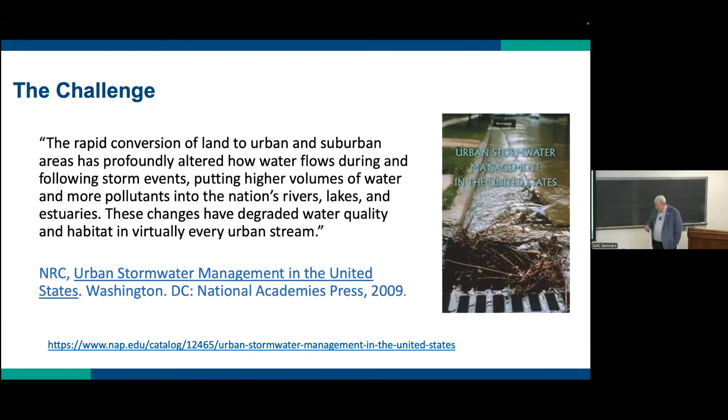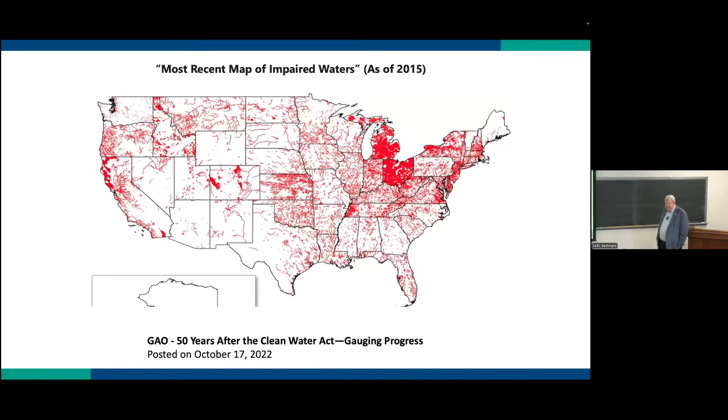And is that true? Yeah, look at the 303D list. This is from 2015. I don't know why I couldn't find a more current version on the web, but basically it's not good. And some of these areas that I think are redder than others, I think it's just because they've done more sampling and found more areas where that's the case.

Okay, back in 1978, the Pennsylvania Drainage Code was 2 pages of mimeograph sheets. And a manual we're working on now is like 600 pages. So there's been a little change in the regulations. But tell me, how can you not reasonably change the quality or quantity in a natural channel? I don't know how you would implement that on a regulatory basis or even as an engineer in design. I just thought this was kind of interesting.

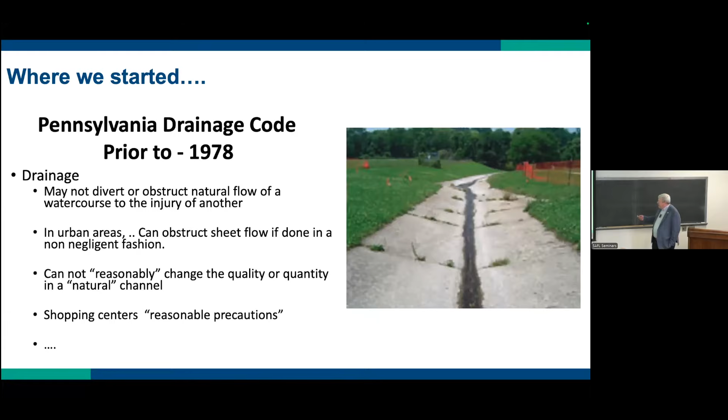And then shopping centers, you need to take reasonable precautions. All right, and I don't know how that happens either. And in the drainage days, we just moved the water out of the way. That was the whole purpose.

Then in Pennsylvania in 1978, following Hurricane Agnes a couple years previously, the state legislature put in a new law. What they said was to address inadequate management of accelerated runoff of stormwater resulting from development throughout a watershed. It's always kind of comical that a hurricane caused them to do this, and these sites really don't help that much in a hurricane. But anyway, back then we used TP40, which is a rainfall map of the United States.

And there it is on the right. So you go in, you look where you are, pick the button, and that's exactly the 2-year storm or the 10-year storm. And what we used was 2, 10, 25, 50, and 100-year extreme events, 24-hour storm, the design storm using the SCS Type 2 distribution, and match pre-construction peak flows.

Does that sound familiar? We're still doing basically this, right or wrong. SCS TR-55 was fairly new, replacing the modified rational method. I still have engineers in Pennsylvania insist on using the modified rational method, even though we've outlawed it for about 5 or 10 years there in Pennsylvania.

Calculators - the only computers were in the surveying group, which only had HP computers. For routing, we used curves. We really didn't do routing of the water through the systems. And the results: we built very, very large detention basins. And that's my 1978 Oldsmobile Omega, so I can guarantee that was what happened in that particular period of time. I now use that as a bad example, by the way. Too deep for vegetation growth, heat, and all that sort of good stuff.

But anyway, the act was revised in 1983 to address problem areas. So then you would have some areas where, because of stream restrictions, the 100-year storm would have to be reduced to the 50-year storm or 25-year storm using the release rate method. And that resulted in bigger detention basins.

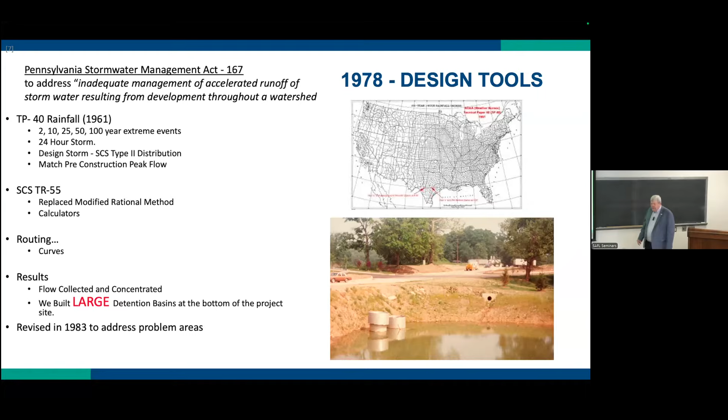So ASCE journals at the time were telling us this may not be working quite so well, even back then. Rich McCuen, a personal favorite of mine from Maryland, talked about the question of whether we're really effectively meeting the intent of stormwater management. Phil Bedient had an article that talked about the major source of stream pollution coming from urban non-point sources, which shows how good we were doing at reducing wastewater treatment pollution, I would say, in some ways. And in 1988, Rich McCuen and Glenn Moglen both talked about how basins are ineffective in controlling degradation of erodible channels.

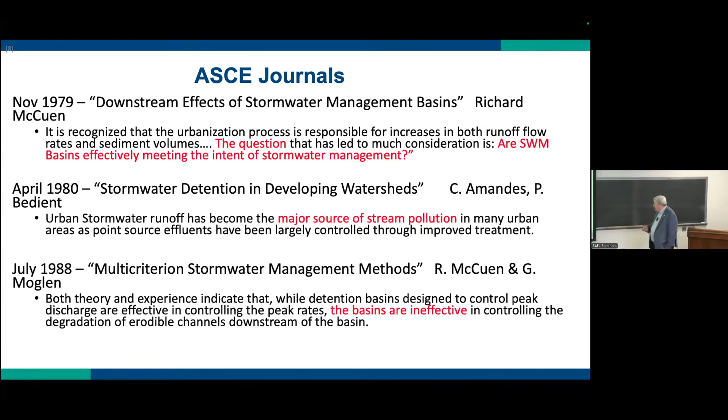Not that we paid attention to any of this, but the science was telling us this along the way. Glenn Moglen at the time was an undergraduate student, so he's going to be working for a lot longer - he's very famous in this area as well. And so then we had a boring decade or two. Nothing changed. We're still doing this.

We know it's not working and trying to figure out what to do next.

I like this. This was an eBay for sale item during a drought. It's a Texas rain gauge, and it was going for 11 cents. I wish I had bought it. I thought that was pretty amusing.

So the next phase that really shifted things was MS4 Phase 2, and green infrastructure starting to come up with some of the ideas. MS4 Phase 2 really started looking at non-point source pollution, and green infrastructure started looking more at the complete hydrologic cycle, or that was the intent. I'm not going to pretend anybody really had any idea how that worked, other than you put water in and soak it into the ground, at the time when we started building these.

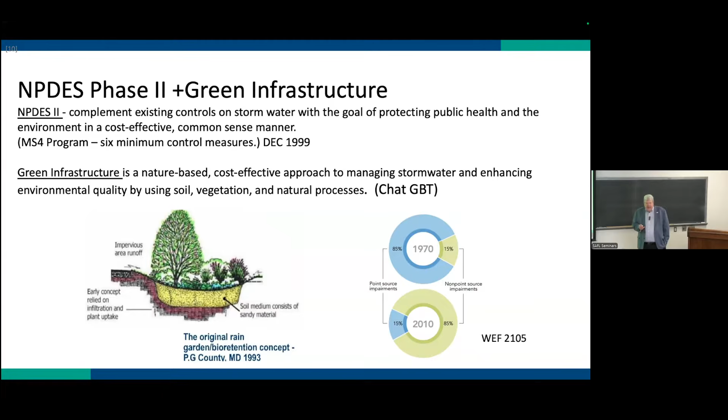I also noticed that in 1993, they didn't have any underdrains in their original design. They added them later. I have one underdrain out of about 20 rain gardens on our campus. We don't really like them very much.

So I actually did my master's thesis around 1980, looking at how ineffective detention basins were on a watershed basis as you start moving downstream. And I'm very good at hiring smart, hardworking people, so I don't have to work that hard. Clay Emerson was a master's student at the time at Drexel, and Drexel called me up and said, 'We don't have anybody in stormwater at Drexel, can you help?'

So I joined his committee, and he actually, as part of his master's, went out and surveyed 111 detention basins. That's a lot of work. He basically modeled the site for 2 inches of rainfall using some different rain gauges they put out to get a characteristic of the rainfall patterns.

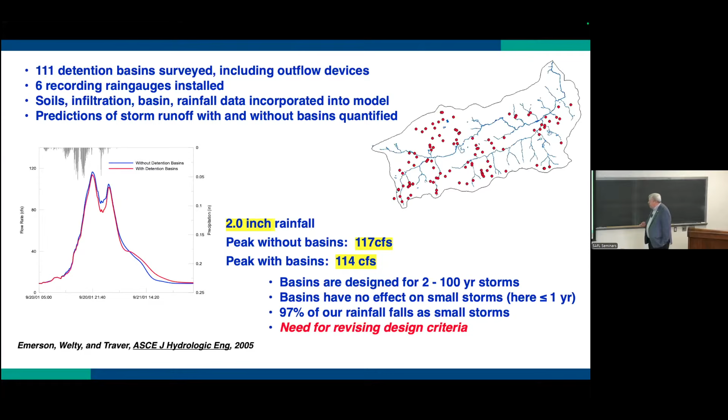He found that for 2 inches of rain, these basins really did nothing to reduce peak flow. And they shouldn't—they weren't designed for 2 inches of rain, they were designed for 3.5 to 4 inches. All of them had low-flow channels, so we didn't want to get the grass wet or anything during these smaller rainstorm events. So they might be working at that basin right downstream for that design storm, but on a watershed basis it was not a great solution. So I hired him immediately, and he became our first PhD in the area of stormwater.

At the same time, we started working again—I'm going to go back to that National Academy study. This, to me, shows the problem. If you look on the left, we have a more rural or forested stream; on the right is an urban stream. It's not the fact that the 2-year storm is bigger, it's that every storm is bigger. Whether it's a quarter inch or a half inch, you have amplification by the urban environment of all these storms, which makes very clear some of the issues we have to deal with.

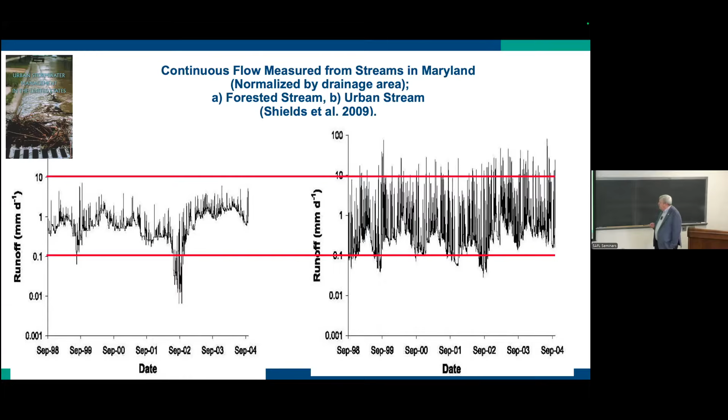At the same time, I was working with our Pennsylvania DEP on what this meant now, looking more at the hydrologic cycle. So I did a simple plot using 50 or 60 years of daily rainfall data, plotting them on a mass curve. Very easily you can see that if I have about 1 inch of capture, 45% of my hydrologic cycle in volume is less than that. If I start adding an inch for the bigger storms, I'm up to close to 80%. Philadelphia now uses 1.5 inches of capture for the combined sewer overflow. So it really shows how impactful those small storms were, and the volumes for water quality, recharge, and all of that were completely missing with our detention-based approach.

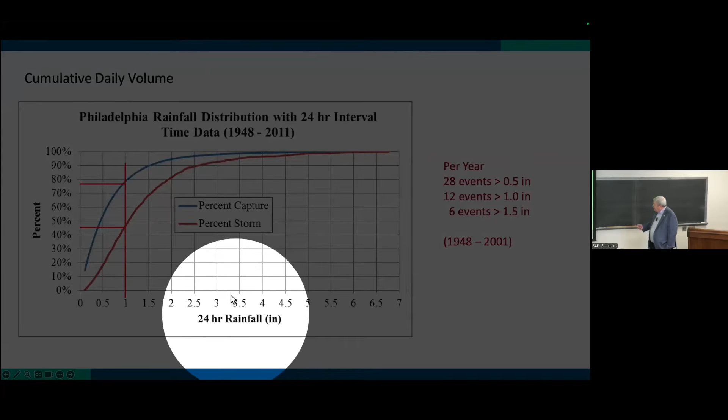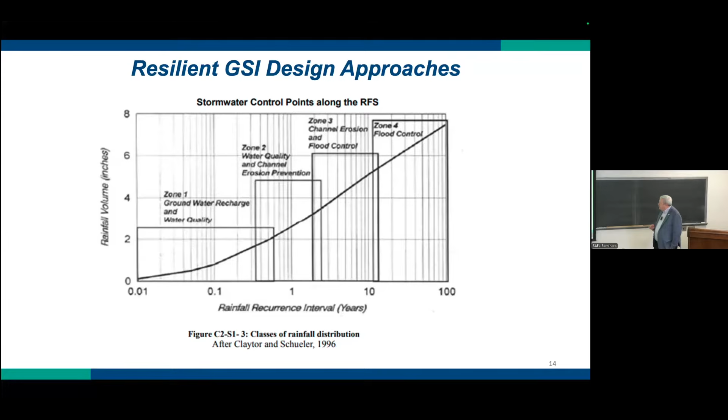Some very smart people, like Tom Schueler, started coming up with new approaches. He said maybe we should have one target for water quality and groundwater recharge, another target more for geomorphology, and then get into the peak flows and flooding flows as well—break the problem down in your design and approach to the different aspects we want to address. Pennsylvania kind of did this, and I was on one of the committees.

We argued about this for about a year, and we ended up coming up with this for Pennsylvania: the water quality and water quantity for the 2-year storm, and really for all storms up to the 2-year storm, have to be the same pre and post construction.

That's a pretty heavy amount of water, like 3.5 inches of rain. But that's not just for water quality, it's more for geomorphology. I think Pennsylvania has more streams per land area than anywhere else in the country, so we had a lot of problems with geomorphology and streams.

And then, of course, we can't get away from the 2, 10, 50, and 100-year, 24-hour peak flow designs as well, so that's also brought in here. So that was a big change for the state.

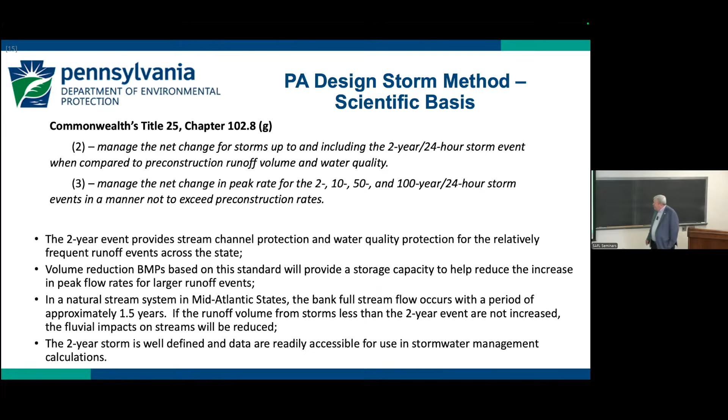So since I have to put a little Prince party like it's 1999... all right, no sense of humor.

But basically, looking at it, we had a lot of new tools. We're using TR55 still, the Type 2 rainfall distribution still, but we had computers so we could do some routing. Rain gardens were introduced in the 90s. At first, the ratio of 1 to 5 was recommended, which is the impervious footprint to the size of the bowl or the surface area of the rain garden, no more than 6 inches deep.

I think it says up to 80% compost, which is horrible—don't do that. We need at least a half inch an hour to build without an underdrain in Pennsylvania. They did not want to build infiltration until you had at least a half inch an hour.

They had static designs, and there are a lot of places still use this, where you look at the results of the site by looking at the volume of the bowl and the volume of the void space. And that's it for the static design.

And so we had questions: Is it dependable? What happens to back-to-back storms? I love the question one time I had, what happens if you have a back-to-back 100-year storm? I said, go to high ground—I mean, it's not a 100-year storm probability.

How to build these, how to maintain these, how does infiltration and evapotranspiration work? What happens in winter? Why use soil? Rock has a bigger void space. A lot of questions. So what have we learned?

Well, we built a lot of places at Villanova with the help of the state and some other funds and the university itself. So we have rain gardens and wetlands and porous pavements and green roofs at a lot of different sites throughout the years.

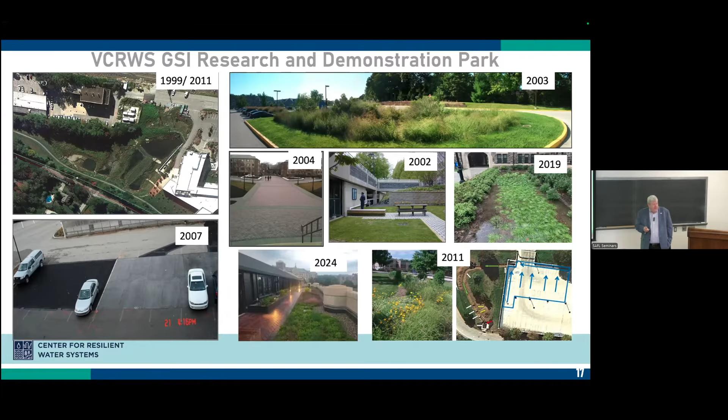And the 2003 rain garden at the top—I called it bioinfiltration—we're going to talk about a lot during this particular talk. I apologize to those of you who heard me before, because I always bring this site up because it's a great site. So, rain garden 2001, we violated everything in the state manual, but the state manual hadn't been written yet, so I could do that.

So basically, we made a bigger impervious surface, made it deeper, like 18 inches deep, used a bigger footprint. We just mixed sand and concrete sand and the native soil together, that's all we did. Put some mulch in and planted it. No underdrain, no liner, no gravel, none of that stuff.

The one thing we did right was build it right. You notice the backhoe is working from the side, not from the bottom, so there's no compaction of that surface.

The other thing that's interesting about this site: when it fills up, all of a sudden water goes over a weir and bypasses the site. So when it's full and you have a hurricane, it's never had any erosive motion over the surface, and it's never had a sediment load coming from pervious area that eroded.

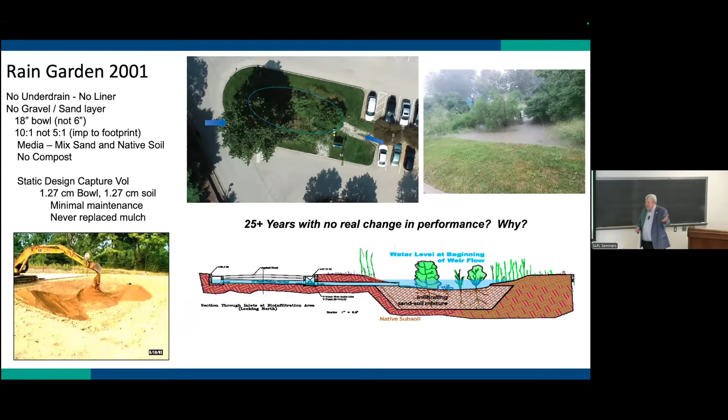And I think that's one of the reasons it's successful, and I can prove it's successful. We have been monitoring since 2003. We built it in 2001, so 25 years later, it has the same basic infiltration rate as we had when we first built it.

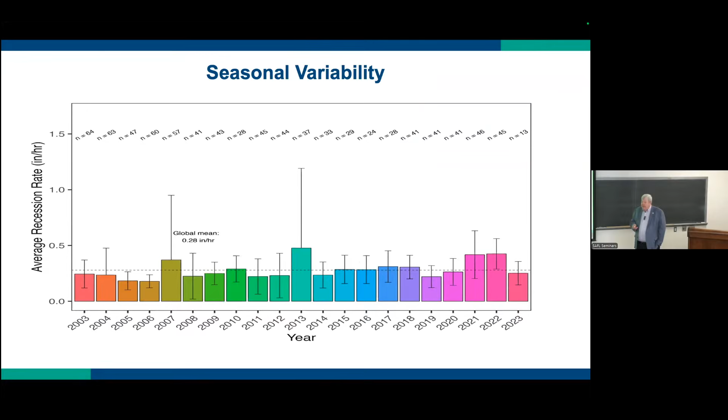Our maintenance program is very complex: we go in once a year, cut down all the grasses and rake it out, and that's it. So basically, I think we can say it's dependable if you build it right and don't neglect it.

We also started working with some of your previous speakers, Allen Davis and Bill Hunt, on one grant, looking at what we called the hockey stick approach. As a Flyers fan, sorry about Minnesota, but basically the blade here is all the void space and the bowl's volume.

And it very rarely had any outflows during events less than that volume. The ones that did occur were in the wintertime, when you have snow - we have snow in Philadelphia too. I've seen piles of snow about 15 feet on top of the rain garden, which makes it very hard to do a water balance.

The other interesting thing is when we look at this basically static design, it should be operating along that long handle. So once it's filled up, you should not get any more removals, right? But what we're finding out, storm after storm after storm, we're exceeding our design expectations on this site.

And then we looked at our treatment train - we were seeing the same thing. We had Superstorm Sandy, and it got rid of like 4 or 5 inches of rain on a site designed for 1 inch.

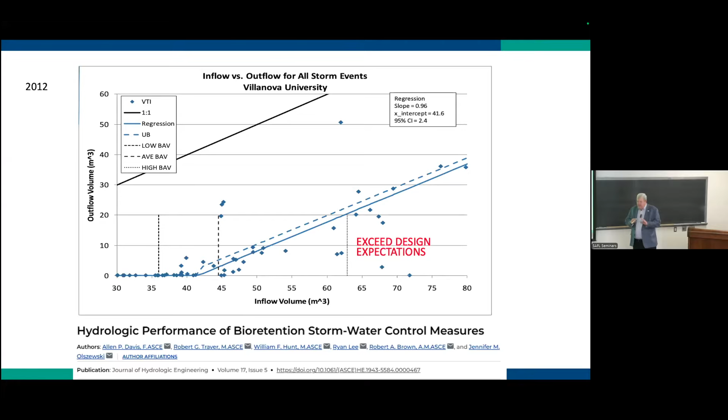We've seen this exceeded performance on 20 different sites, but Andy just wouldn't give me the time to show them all to you. We also not just worked at Villanova, we've done some work in Philadelphia through the EPA, looking at one of their infiltration trenches. They don't have a lot of space in the 17th century city, so a lot of times they build infiltration trenches under the sidewalk with some tree trenches. Basically the water comes down, comes in, and once again, when it's full, it bypasses.

This one was built so that with about 2 inches of rain, it should be up here. But it never filled up more than half full over 30 months of monitoring, including a lot of storms greater than the design storm.

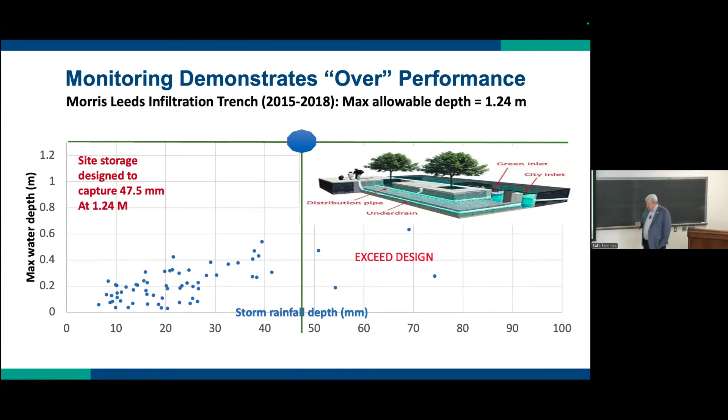So obviously, with the static approach, you're building it twice as big as you need to. And that extra space - the water can't even get in by the hydraulics - so it's a complete waste of time and money. As a city engineer, I'd be much more interested in building using that, looking at infiltration as part of it, and getting a lot more effectiveness for my particular sites.

The last one I want to show you is one we did near the Philadelphia Zoo with the Philadelphia Water Department. A little different setup - they had one swale, a grass swale, rain garden, no under drains. They did have a rock bed to the side - it was supposed to go underneath, but they ran into a utility, so they had to put it to the side.

I actually like that better because you're expanding your infiltration footprint, so you should be getting more performance. And the nice thing about working with the city is they can turn on all the fire hydrants so I can check them out - using the John Gulliver approach, filling up these things with water from the fire hydrants.

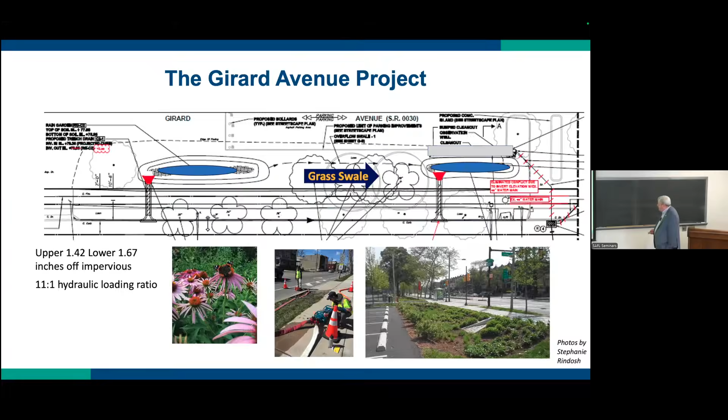Here's one storm, and I have tons of them I could show you. We filled it up with the fire hydrant. Then, thanks to Father Peter - or Father President - we got an inch of rain overnight to help us, which was kind of unplanned. The next day we went back and filled it up a second time. So in less than 48 hours, it got rid of 6 inches of runoff volume.

It was interesting - we saw water moving to the rock bed before it overflowed into a pipe connected to the rock bed. But the other really interesting thing was that the second it stops raining, or the second the water stops coming in, you start having recovery of your system. Most rainstorm events aren't a single peak flow - they're a little peak here, a little peak here.

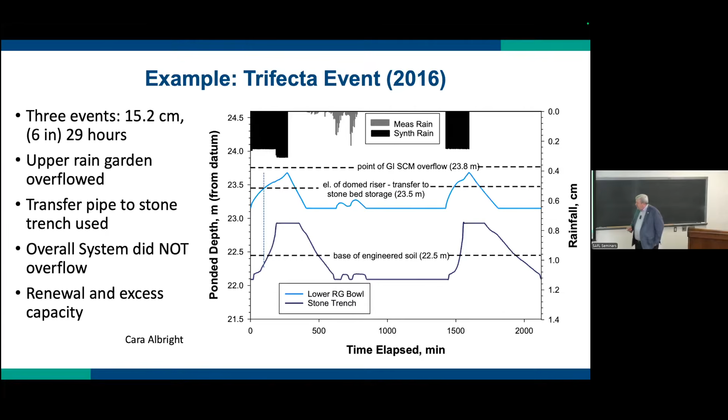So from all these studies, and a lot of studies you haven't seen, we came up with what we call the evolution of infiltration, where we want to use the vadose zone, the soil physics, as part of our rain garden design. SWMM has most of that built in, Recarga and a lot of other models out there can do that soil physics too. The other interesting thing is how to increase your saturated hydraulic conductivity.

Freeze-thaw cycles, plant roots, macropores, all of that actually increases or recovers your saturated hydraulic conductivity. What decreases it is something we have control over: stomping, bad construction, poor soils, poor media. Any site that's been built right doesn't have a problem with long-term performance.

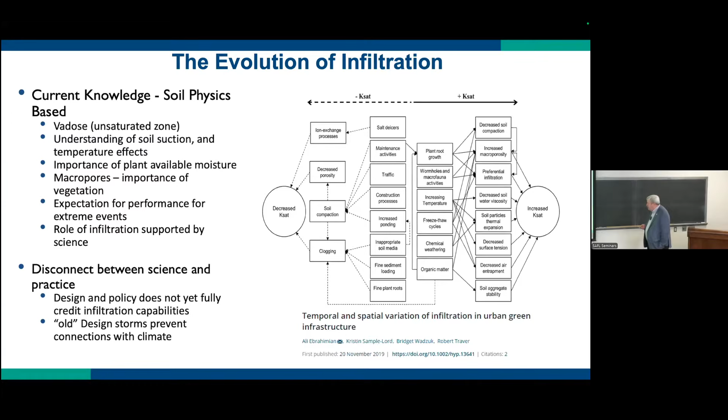We have two sites at Villanova that did not work. One was built over an old parking lot, so once we discovered that by filling it with water, we just put a few chimneys of sand in it, and it works fine. The other had concrete sand mixed into the media, which sealed it immediately, so now it's a nice little pond. But that's 1 out of 15 or 16, and it was a construction error. 1 out of 15 or 16 is pretty good.

We also shouldn't forget about evapotranspiration. How much evapotranspiration do you get during a storm event? Not much. But after the storm event, it's very critical for recovering capacity for the next storm. If you have that ET and the plants, you're also regaining root pathways for infiltration, maintaining the site. So this was just a little example of how powerful this can be.

On the right is a green roof we built at Villanova a long time ago, which had an underdrain and performed pretty well. The blue line is a mass curve of the rainfall that came in over a 9-month period, and the pink is the outflow through that underdrain.

We also built a little weighing lysimeter on the roof to measure the depth of water, the weight of the water in the soil, to understand it a little better. On that one, the blue is the same rainfall accumulated mass, the green is what left by evapotranspiration, and the difference between the two would be considered your overflow, which is very minuscule.

So we found that not putting an underdrain under a green roof increased its performance by about 30 or 40%, which is kind of amazing. This shows how strong those plants are at removing that water, and we can translate that to rain gardens, bioswales, and other sites as well, which we have done.

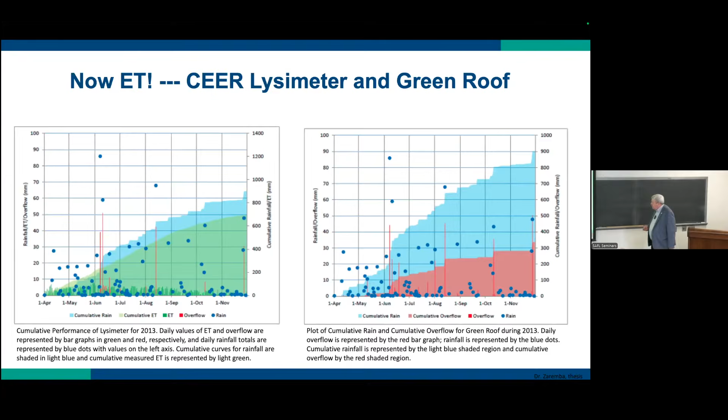Another question I brought up was, what happens in major events? This is a 200-year, 12-hour storm, definitely more than the little over 1 inch this site was designed for. It's got some pretty heavy peaks, but there are periods of recovery between those peaks. Our site, designed for about 1 inch, got rid of almost 3 inches of rain in this extreme high-intensity event, almost 3 times what it was designed for.

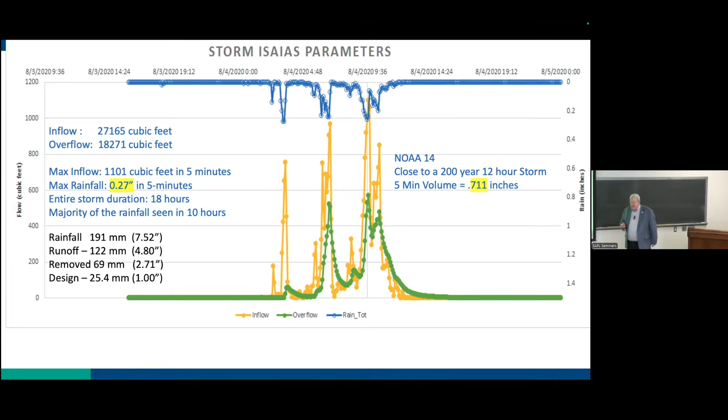We see that in multiple events. Superstorm Sandy was 3 days of steady rain, so we also had 3 days of infiltration with that particular storm. We see that pattern a bit more when looking at these projects, and it's nice to have 23 years of data to draw on.

You can go through and do mass curves and try to figure out where everything goes. And so this is our looking at their water cycles. And the key takeaways from this particular site, I would say, is 54% of the inflow to this rain garden is removed by infiltration.

And 20% by evapotranspiration after the storm. So one of the problems everybody was thinking that all that water disappears is going down into your groundwater. It is not. A big percentage of that is actually going into evapotranspiration from the soil after the storm event.

So if you're doing a mass loading with water quality, that's a very important concept to remember, which we are trying to do the same thing now for water quality data, looking at the same type of cycle as this one is. So what have we learned? Well, proof of concept, I think we got that, works pretty good.

Back-to-back storms, I don't really worry about it. It doesn't occur, and when it does occur, it's not enough significance to make any difference in my results. Infiltration and evapotranspiration are critically important, and I get to the point where I see some of these sites are built with so much sand that the plants struggle, and they're not going to work as well about maintaining your infiltration pathways. I'd rather have a little more fines in there and make these plants happy. Landscape architects will probably like that statement.

If I go down, what I have in process, water quality, we're still working on that. Longevity, maintenance, got a good track record. Still have a little more to do. Climate change, we'll talk about. Extreme storms, I'll talk about that a little bit more.

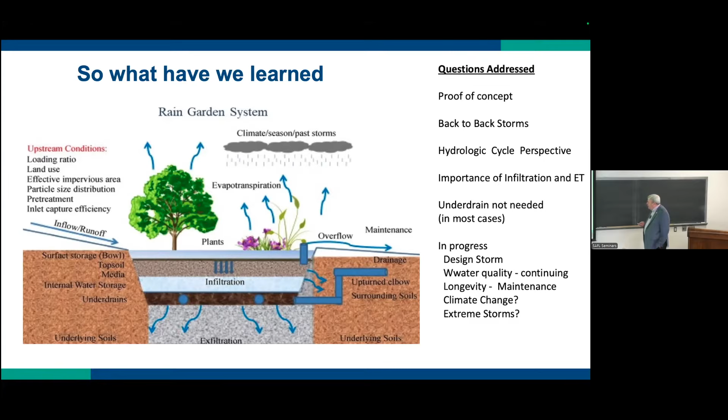All right, I don't like design storms. They've been stuck with me since 1978. We got to do something better. And what I mean by that is how we do a design storm.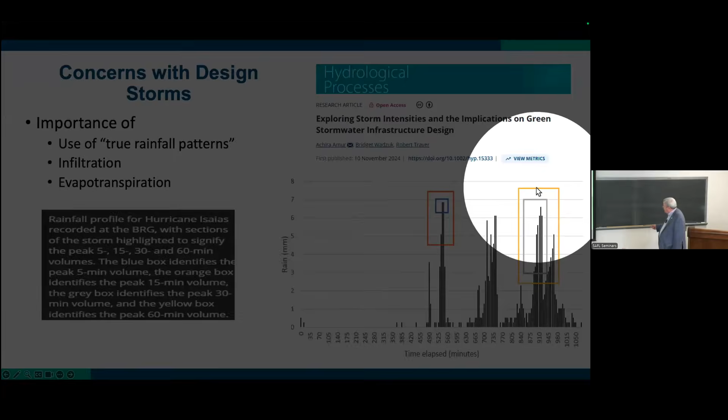So this is hurricane, that superstorm Isaias I mentioned. If I look at the statistics, there's the 5-minute peak, there's the 15-minute peak, there's the 30-minute peak, and there's the 60-minute peak. In our IDF statistics, those are all smashed together into one location in one particular storm in the statistics. If I go through now and look, basically, this is what I normally see on a 2-year storm.

Is very distributed rainfall all over the place. It does not have that steep peak in the center. Those are both the same volumes. And that same very large peak in the center will prejudice your design to rock beds versus the green infrastructure that takes a little bit of a time. And we just don't see that high intensity center point.

And there's a 25-year storm and a 2-year storm, and I can show you like 50 of them. Sometimes I think we're taking the thunderstorm 5-minute period and putting it in the middle of a big warm front or cold front or cyclone type rainfall event where you don't have those high intensities. And that prejudices our design.

And I'm not the only one who thinks so. McPherson, I have no idea who he is. In 1958, I was only 2. John was about 8. Basically come through and talked about this as unrelated values from a variety of storms, which are for a rarer occurrence than indicated.

Yen and Tang basically said design storm is to be used for the purpose of design of drainage facilities based on catastrophic failure. I don't consider a rain garden overflowing catastrophic failure.

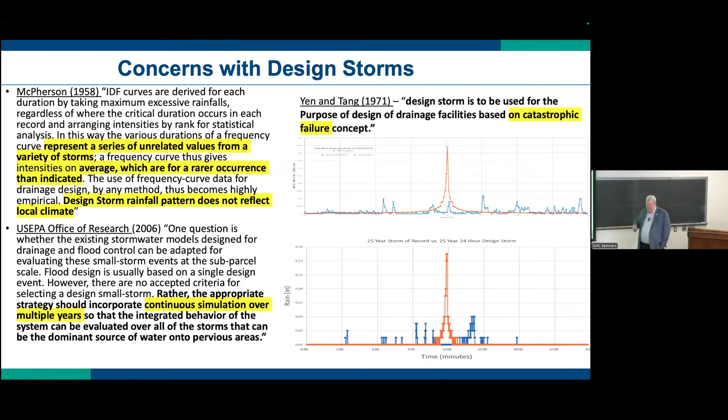Basically, the Office of Research in 2006, which we used to have an Office of Research, talked about the continuous simulation over multiple years would be a much more superior way of looking at these smaller storms and water quality aspects. So we're trying to do that.

Since the Pennsylvania, my former student convinced me to help write the new Pennsylvania Stormwater Manual. I should have flunked her. But basically, we're trying to put in some of these concepts now. So we're allowing the use of continuous simulation.

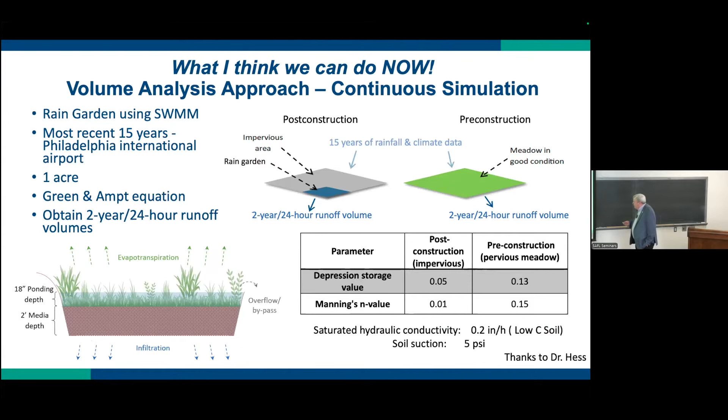So here's an example site just to show you how it works. We're using SWMM. There's a lot of models you could use for this. And it's a fairly low, 0.2 inches per hour, low C soil saturated hydraulic conductivity. We're running 15 years of rainfall data through this site in 1 minute increments.

And luckily, the state law, they wrote it, says the 2-year storm has to be the same before and after. It does not say the 2-year rainfall. So I'm using the 2-year runoff. So basically what we're doing is we're running the model for 15 years for 1 minute data, which is very simple to get these days, running it through, taking the worst 24-hour period in each storm, sorting them, and the middle one is the 2-year storm.

And basically we're advocating this. Now you can still do it the old way if you want a bigger site that's less effective. But we're figuring out this will also give you a lot more impetus in looking at good infiltration sites on your property, so it'll perform better as well as for a designer. And so that's an example design.

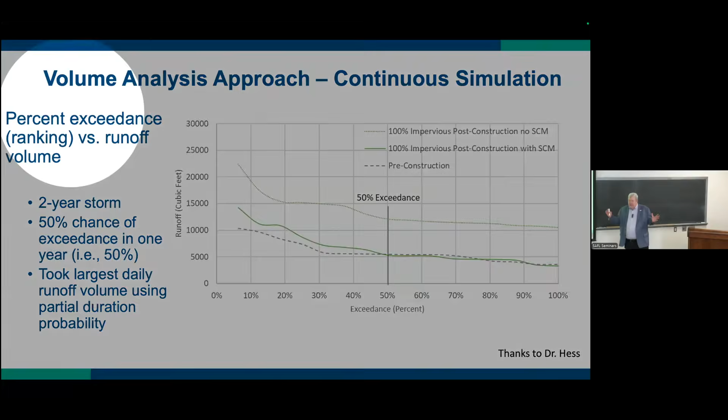One of the things that was very interesting is, and we've done this for all different soil types, you just get a little bigger or a little smaller basin based on your soil type. And we looked at the flow duration curves—you don't have to read this mess of lines—but the flow duration curves with this approach were equal or less than the pre-construction. So the geomorphology up to the 2-year storm was pretty much assured, because the amount of hours you were subject to the erosive qualities would be the same as pre-construction. And we thought that was pretty cool.

Not part of the state regulations, but it's a good way of expressing how well it worked. And in fact, it worked better than just the 2-year. It probably went up to the 5 and 10-year in a lot of cases as well, but I can't require that for the state.

Okay, we finished that. And basically, now we said, all right, we're doing the 2-year storm by a continuous simulation. We can't ask the consultants to go back to a design storm for peak flow design. So we borrowed something from Switzerland, in Zurich, where they just have like 5 storms and run everything through. But instead, we decided to try a storm of record design.

So what you have to do is pick a storm in your record that's greater than, between the median NOAA 14 and the 90% confidence interval for a 24-hour period, for each one of these events, and design your detention basin to meet that value.

And so then we went through it pretty much, and it's kind of sad—in Pennsylvania, we were able to find the 2, the 5, the 10, the 25, and the 100-year storm all in the last 15 years. We couldn't find the 50-year storm; we had to go back 20 years to find a 50-year storm.

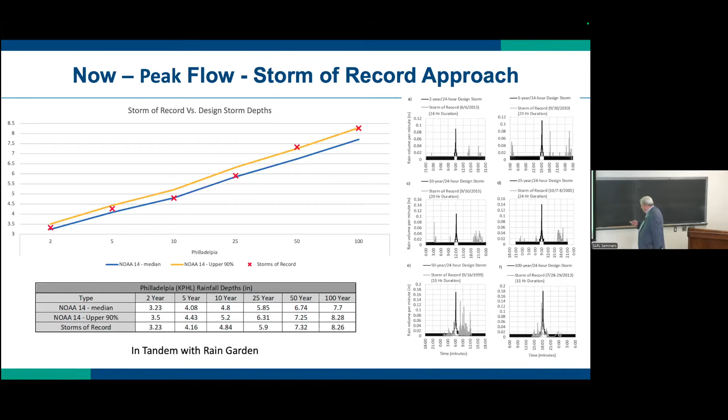And so then we basically did the design. Now, this is assuming I've already also done a water quality volume design, getting rid of that first, the difference of the 2-year storm. So that's reducing my peak flow requirements as well. And basically for this particular site, it got 25% smaller for the detention basin and a half a foot shorter. So is that significant? Well, if we're asking developers to develop 2 instead of 1 site, you want to basically take a look at what is good for the homeowner, life cycle analysis, and cost and things like that as well.

So you can make it come up with a little smaller site. And so Randy is probably going to ask me, isn't smaller less protective? I don't think so.

Sorry about that, I forgot. I had to get rid of all these slides from Andy—he wouldn't give me the whole hour.

But one thing we found was that the design storm pre-construction peak is much higher than anything using these storms of record. It really accentuates that pre-construction peak, so you're allowed to put out more than you would expect out of a natural system—the pre-construction peak in the design storm is accentuated. Now, the good news is it probably doesn't make any difference, because you're never going to have that design storm—it doesn't really happen that way. But we basically felt that this was a very effective design.

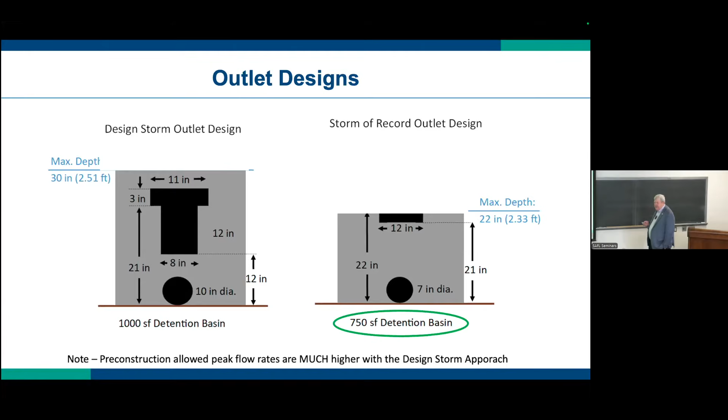And this is still under review and still under revision from the 6,423 public comments. One thing we're trying to put incentives into our manual for is to look at diversion. And the idea is, our rain garden has worked at Villanova for 25 years—it's a pretty good example, right?

And basically what we're looking at is, we understood that during hurricanes, we never have any erosive flows, never have the big sediment loads coming off the grass during those larger storms. And so basically what we have—this is a diagram from that site—it's basically just a little water coming in from two inlets.

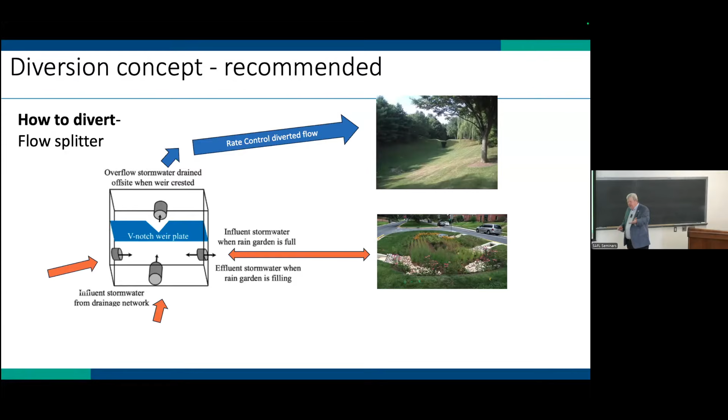There's a V-notch weir that pushes the water into the rain garden. When the rain garden is full, that shuts it out and it goes into a detention basin. We think that is a very good design for water quality and peak flow, especially for homeowners thinking of life cycle design costs for these systems.

Have we done it before? Sure, this is one from Allen Davis at the University of Maryland. They did a curb cut and built a little rain garden in the median strip. When that's full, it pops out right next to it. The only problem is you have to make sure you have enough slope to get the water in. Sometimes that doesn't happen.

Does that look familiar to anybody? Burnsville, I visited in 2006. I'd like to see some current pictures to see how well they're doing. I like the design, but when it's full, water just goes back into the peak flow, so that's a good example of a diversion design as well.

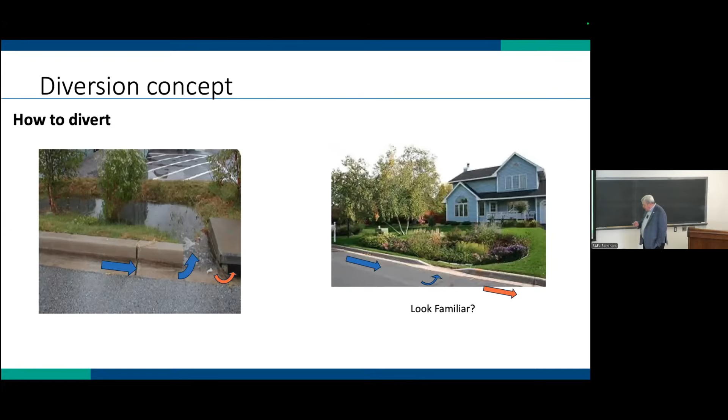So thank you for giving me some examples I could use in Philadelphia. A little bit off the line. I've got a few minutes left, I think I'm going to be almost on time, Andy.

It'll never happen again. But we've also been working on I-95 in Pennsylvania going through Philadelphia. They have to meet the combined sewer requirements of the city, and they're building hundreds of rain gardens, so it's a great avenue for research.

We're doing a lot of things. One thing we're finding is they have a lot of designs with one inlet going to one rain garden, one inlet going to another rain garden. And guess what? Looking at the flows coming in, it's nowhere near what the engineer expected. Some are higher, some are lower, and for different storms there are different percentages of what goes into one versus the other.

It's an elevated highway with inlets designed for a 25-year storm. I'm not sure how the 100-year storm knows to get to that rain garden. They've now changed their recommendations based on our research, so they have to look at that now. I just wanted to put a little hole in the sound wall so when it overflowed it would just pop in, but structural engineers don't like me.

So basically we're looking at another site that has a long swale, and we can take a look at multiple inlets going into one swale, so if one's a little higher and one's a little lower, it's okay, we're still going to manage that. Or you saw the Philadelphia Zoo example that had two inlets going into two rain gardens, so if one gets a little clogged, we have another one.

We also found some inlets were, because of the edge of the inlet, six inches away from the sound wall. It's amazing how much water bypassed for the smaller storms and never went to the rain gardens because of that. So we're fixing that, and the nice thing is being able to combine laboratory and field research to look at some of these issues.

Construction errors, oh my goodness. Filling up, using the John Gulliver approach and turning on that hydrant to fill up the rain garden is the best construction inspection you can find. You can find if your weirs are the right size.

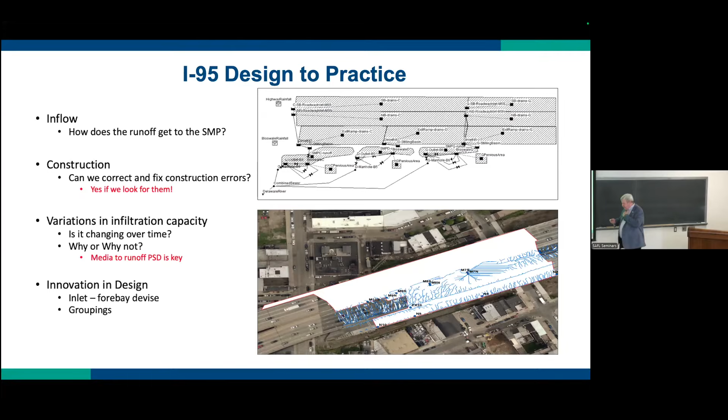Innovations in design—I'll show you one I really like. Of course, Philadelphia has a different term: stormwater management practices. I use stormwater control measures. You use BMPs. China uses sponge city. England uses SuDS. It's very confusing.

But we found one site and it failed. We have all sorts of pictures of construction equipment parked at the bottom of the swale. They made it too steep on the side, so all the mulch came down to the center.

When you have cattails—is that you? No, I thought so, I thought that might be you. Rebecca, you can stand up so people can see how tall the cattails are.

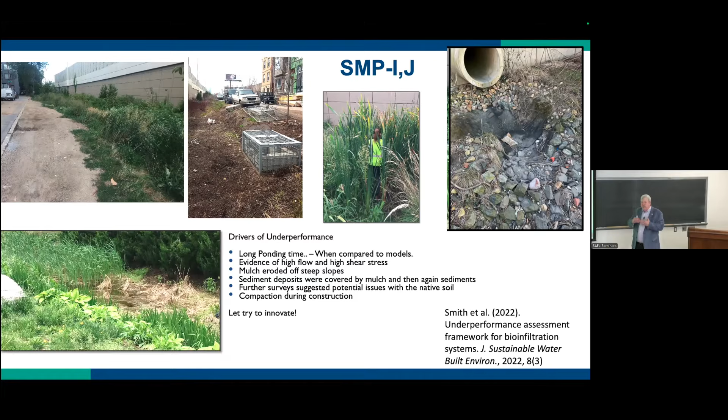So basically, this was obviously built wrong. We had a lot of people working on it—from the geotechnical side, Virginia Smith, and Kristen Sample Lord—looking at what to do with this situation. Let's turn this into a learning exercise: how to figure out what's wrong, what's working, and go through what the rehabilitation is. So we did that, and it's now working very nicely.

We tried a different design. Water comes out of the elevated highway onto basically a concrete pad with no rocks, which I learned from you guys seeing some of your stormwater sites—so I can get a coal shovel and dig it out very easily. It takes a right-hand turn, goes through two steps, then into the bottom of a larger infiltration basin.

What's very interesting on this particular site is we're learning we get a lot of sediment—it's amazing off I-95—but all the floatables, all the trash are there too, so it's easy to come and pick it up. Maintenance is just getting a weed whacker and going up those steps. It's not very hard, it's just grasses.

That should last forever. Your former compadres are still looking at the soil sediment, looking at infiltration rate—we don't see any change, but it's only been 2 years now. We're really trying to study this and learn more about it. If you did that well enough, maybe you can use that bottom part as detention and not even call it infiltration.

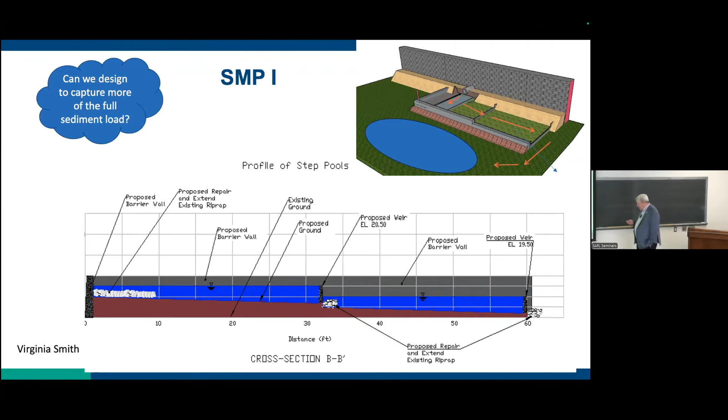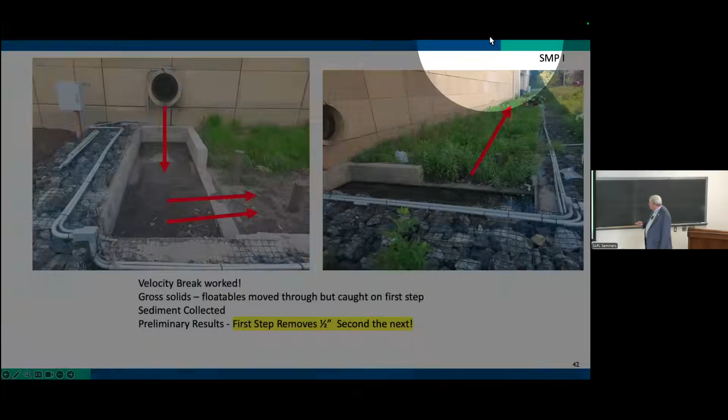So we like some of these designs, and we think we have a lot of things we can learn. Just some pictures of it—you can see the sediment building up, and you can see the grasses as it drops down. I think we built it a little too expensive, but this was the first one.

PennDOT didn't know what to do. So anyway, almost done, Andy. So what do I think we need to do now?

First of all, we need to take stormwater management seriously. I'm tired of going to sites that are built wrong and they blame it on green infrastructure. I'm just—get a life. We know how to build these things. It's time to not let contractors get away with a poor construction job. There's a lot of contractors who do a great job—we need to give them the money instead.

We need to take the design seriously—get the water to the site. I mean, you're not always going to pipe the 100-year storm, but you should know where it's going, right? We need to get the water to the site and understand that the collection system is not an exact number.

So maybe we should not have only one pipe going into one rain garden. Maybe we should have 2 or 3 going into a rain garden to account for that.

For volume and water quality design, I think continuous simulation is the way to go, using a dynamic strategy. By dynamic, I mean include the soil physics, the vadose zone, the wilting point, the field capacity. We know how to do that. That's pretty easy to do. We need to protect the infiltration surfaces and design dual systems.

Why would I design a site for 1 inch to have the 100-year storm going through it? It makes no sense to me. Maybe that's why I'm no longer a consultant.

Designed to aid trash and sediment capture and removal. We should make it easy to do this, because this is the biggest expense we're going to have over the lifetime of these structures.

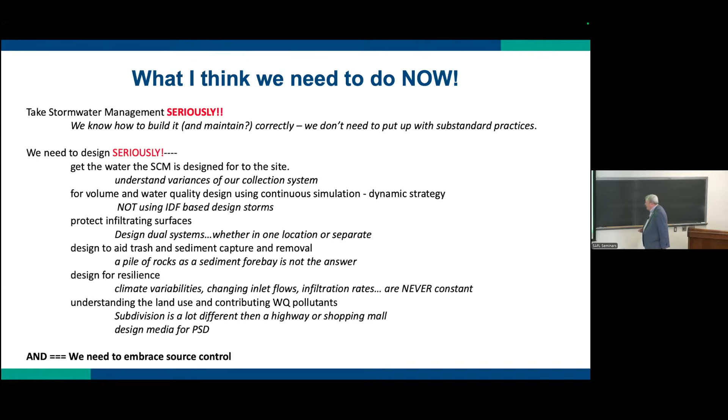I'm hoping eventually we'll have a little more understanding, so we can maybe pick a different media based upon the particle size distribution from these different watersheds coming in. The next generation will work on that, and we need to embrace source control.

What I still want to know is how to integrate volume and peak rate to support flood risk mitigation. I don't know the best way to do that. I don't know if putting detention basins everywhere really solves a lot of our problems.

And we've been doing it since the 70s. I don't see that it's made a big difference. During superstorm Ida, it came through our area, and it was funny to see all the rain gardens and detention basins full of water on a bright sunny day, because the flood came down hours later, past them, and they did absolutely no good.

Water quality strategies need to consider the land use, subsequent pollutants, and overall hydrologic cycle. Is the pollutant challenge the same if I put it through infiltration, through an under drain, or it goes down the street, or just gets thrown up on the snow? We have a need to take a whole life cycle look at this.

I've had a lot of people scared of salts in rain gardens. Well, how about all the salts everywhere else? This is a picture from 2 days ago in Philadelphia, on a grass strip below a Staples. There's probably a lot of salt in there, and that all melts and goes right into the ground.

We actually look at salts in our rain gardens, and so far the solution to pollution is dilution. We see less milligrams per liter under the rain gardens, but by mass it'll be a lot more. Downstream, we see less than upstream because of the water coming through the rain garden. Not sure what all that means yet, so we're still doing a lot of research on that and looking at other water quality aspects.

We're basically collecting all this pollutant runoff in a certain location. That's an opportunity for treatment.

Maybe we can put in iron filings for the tires, or if it's a gas station, look at PFAS, and figure out the sources of pollutant to use in the media design. But that also means we have to have a maintenance approach where maybe every 10 years we remove 6 inches of media, restore and help the infiltration, get the volume back, and also have more places for the pollutants to hit.

We don't have that worked out, and we need to figure that out. And will we ever get serious about salt?

Those are the steps into my brand new engineering building, and you can see the piles — it's hard to see the piles of salt there. We don't take salt seriously; we throw tons of it down everywhere. We need to start taking that seriously if that is an issue we want to address.

And almost my last point: we do SCMs for new construction, but there are thousands of legacy sites, and we also have good community groups and other programs to start restoring other impervious surfaces.

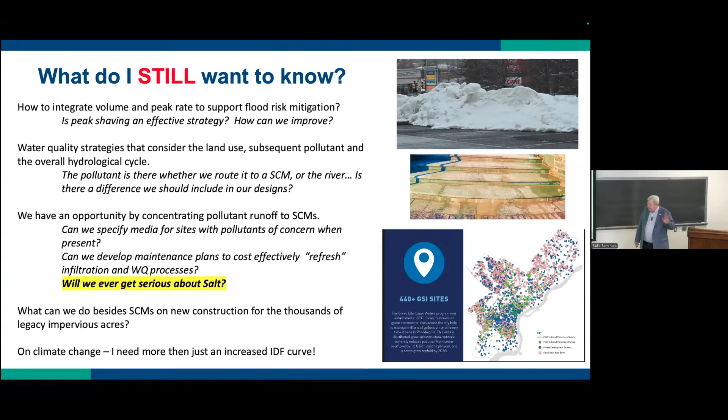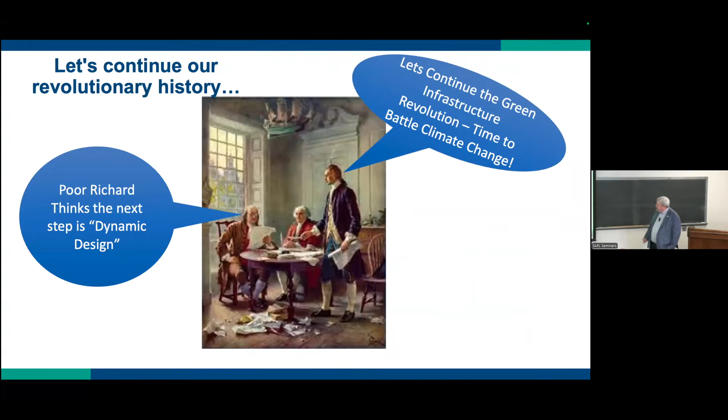And finally, I want to continue our revolutionary history, right? Thomas wants to continue the green infrastructure, time to battle climate change. Ben Franklin thinks dynamic design is right. John Adams still likes the modified rational method.